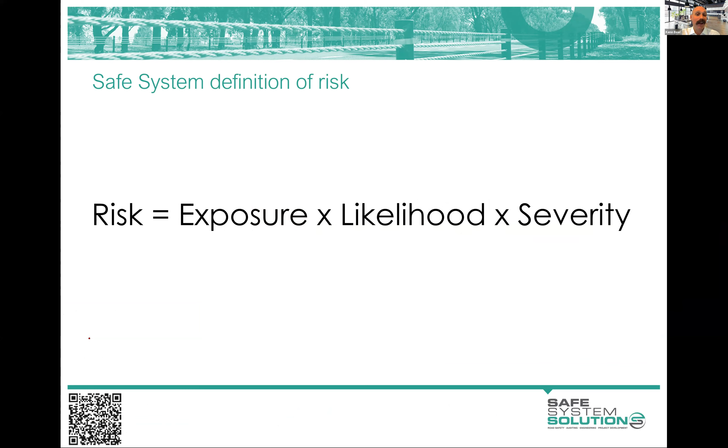Yes, so we're on to module 3, but I am going to start with a little bit of recapping now on just a couple of points. So I love the fact we're now really heading in this exposure, likelihood, and severity way of identifying risk, and starting to get more and more clarity around what factors are fitting into each of those. That is very critical to a safe system assessment. And as we did there with Ranjit, it was all about what can we change to influence, or what is influencing the number of vehicles going through that intersection, the number of pedestrians, number of cyclists.

That's our exposure factors. Now, there is a bit of confusion out there on exposure, because in a very traditional sense in road safety, we've used exposure very broadly. We've talked about things like length of time on a crossing, or number of conflict points as exposure factors, and a whole lot of different things. Also, in that new Austroads Guide to Road Design Part 6, which is roadside hazard management, they use a slightly different exposure calculating methodology. But for safe system assessments, it's tried to remain very simple for exposure, very clear, and very much not double counting anything.

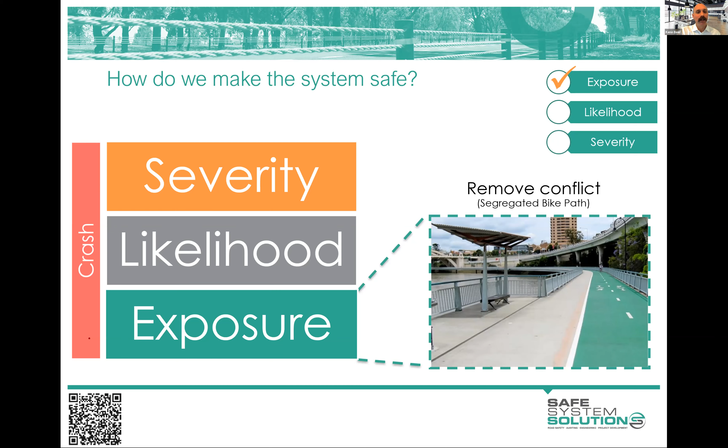So just boil it back to what's influencing the numbers going through there. If we've removed a vulnerable road user away from traffic, fully separated or with physical separation, we can attribute that to a change in exposure. And in the Austroads Safe System Assessment Framework, we see here there are definitions for these things, which I didn't get you too involved in before, but you see there, AADT, side road traffic volumes, number of motorcyclists, number of pedestrians, and the like. That's the key part of it.

Because of some of this confusion around exposure, likelihood, severity, how you score different things, where you attribute things: the Austroads Safe System Assessment Framework was developed without having done many, because it was a new process. That was in 2016, there was a bit of use of it at the start, and now it's becoming really widespread. We've been doing a lot of them over a long period of time, and we've identified areas where there is not good clarity in the Austroads document about specific elements.

We've talked to industry, mainly the Victorian Department of Transport, about this, and we've provided these clarity fact sheets on specific scoring issues that aren't well defined. We've provided all of those on your memory stick and in Moodle. This one's a relevant one for today's topic: when we have a cycling facility, how do we decide if it's changing the exposure, the likelihood, or severity? So if I've got a bike lane, we know that's likelihood because you're not physically separating. A distracted driver could easily enter that lane and hit a cyclist. It reduces the likelihood a bit. The cyclist is not directly in the traffic lane, but it doesn't separate it.

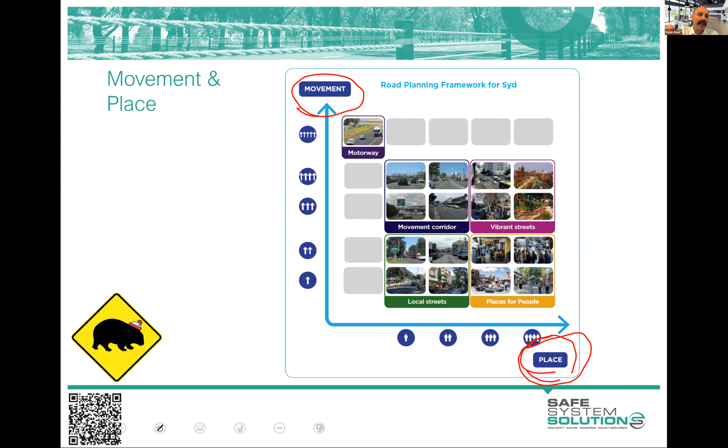So what you then have is the ability to categorize roads as to their movement function and their place function. And you can start up here at the very easy one of motorways, which have a very high movement function and no place value, okay? You're not going to have trade, interaction, socialization on a motorway. You don't want that, right? And so it is a movement corridor.

And I should say that movement is not just about moving cars and trucks. It is movement of people and goods. So in the same sense, we could have a fully separated bicycle superhighway, and that would be put in the full movement category. You don't want people socializing and trading and interacting on your major cycle route. It is a movement corridor.

Okay. Let's go to the other extreme, something that is almost exclusively place value, maybe a tiny bit of movement. We're talking about your malls or your shared zone areas, people interacting, permeating across the whole area, trading, socializing. We see lots of cafes and pubs and bars and shops and fruit stands and entertainers, it's an exciting, wonderful, interactive place. And we're not trying to move people and goods through there at any speed or at any volumes. That's not the function of that street or road.

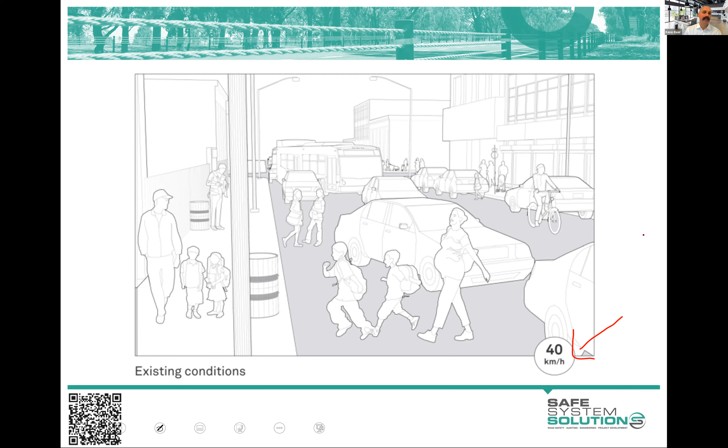And when you come up with ideas, put in brackets after it either an E for exposure, an L for likelihood, or an S for severity, as in this will alter the exposure, the likelihood, or severity. So maybe you decide you want road safety barriers down the side of the road here, which will reduce the severity of run-off-road crashes for vehicles that leave the road and are going to hit these poles. Now, I hope you won't be saying that, because I hope you can see how much that would erode the place value here.

It would give you better alignment with safe system principles and probably block some of the pedestrians walking on the road too. That's bad for place, right? So, in the exercise you would write, you know, install flexible barrier system on roadside, S for severity, influencing severity.

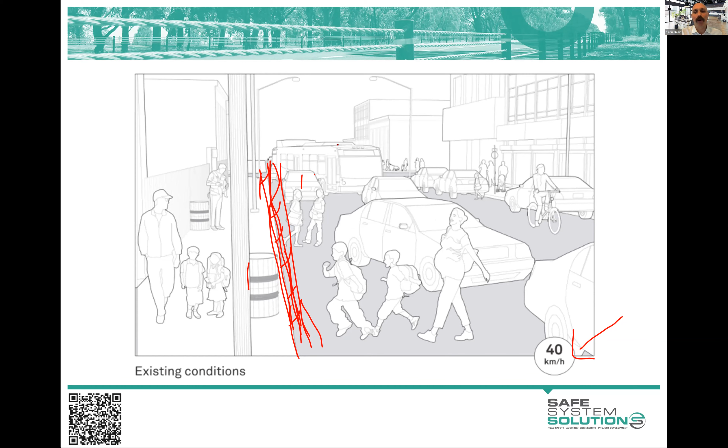So I want you to just spend 4 minutes or so. Have a stretch, fill up your coffee or water if you want. Have a think about some alterations to this area that could be done to make it better aligned with safe system principles, and also acknowledging it's a place for people function. Jot them into the chat and we'll come back in 4 minutes.

Okay, good question there, Cayman. Is it a public transport corridor? Yes, it's a bus corridor, as you've seen there. Don't get too worried though about the particulars of it. It's more the general idea that we're running with.

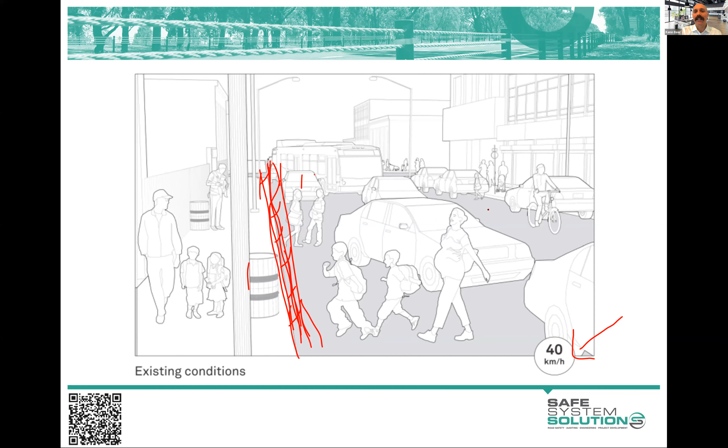So I think I won't get through everybody's comments there. I've had a quick scan. I think I've taken some of the main points, and I think you've done really, really well there. So let's look at artistic impressions of alterations to this. I better get rid of the barrier there. That's not going to help, is it?

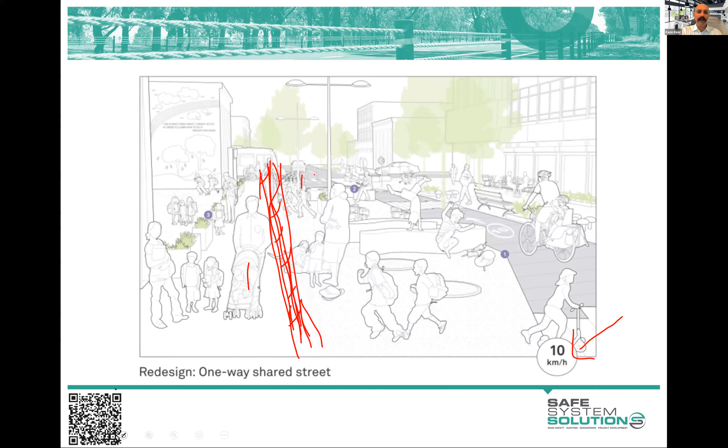I'm not saying this is right, but this is artistically a similar area where you've got these big widened footpaths, which reduces the likelihood of crashes. You've got very low speeds, reducing the likelihood. This is providing some movement function. As I said, I don't think they need these crossing points as such. If you can texture the whole area and have it as a shared zone, it's a far better outcome. I think this is actually from a country that I don't think uses the concept of shared zones.

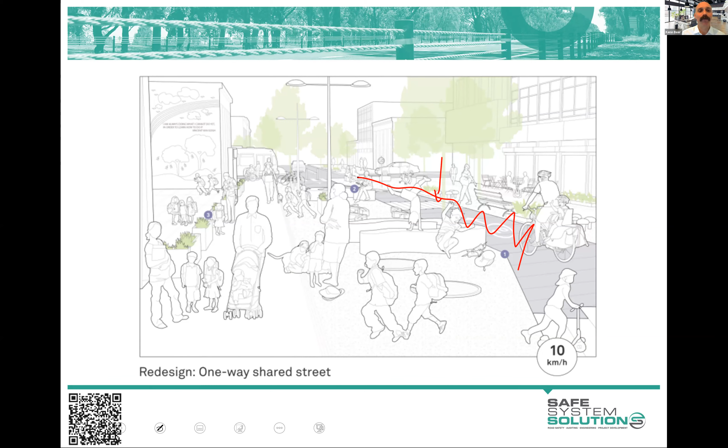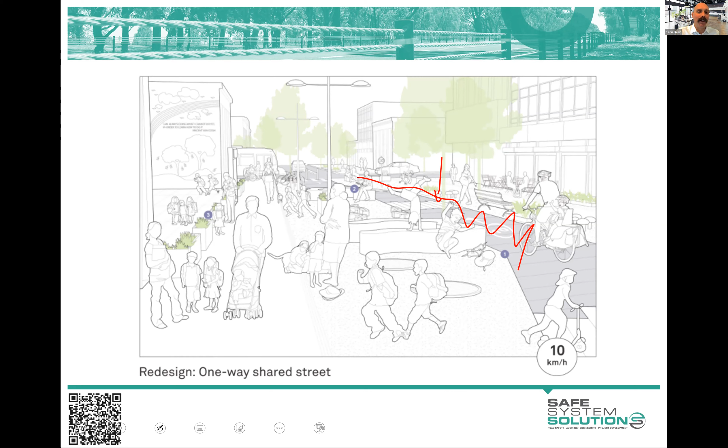It's actually from the USA, interestingly, which doesn't look like it. Looks more European, but they're trying to get more of that into some of the cities, which is wonderful to see. But you can see immediately that this area has more place value. And you can see also that it's going to be far, far safer: it's going to have reduced exposure because fewer vehicles are going through there. It's going to have less likelihood of crashes because of slower speeds. It's got wider footpaths and the like. And the severity is going to be significantly down. Wins all around.

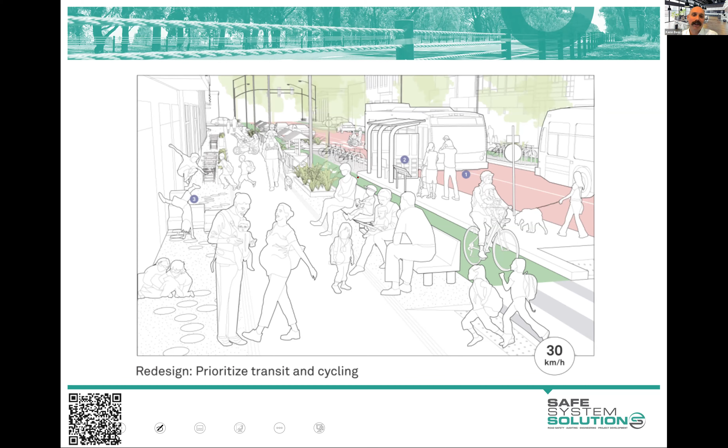As you raise that movement requirement, you can start to see some ways that this starts to get produced. This is as you're almost getting out of these major place-for-people-only thinking. But remember, I'm not saying here that it's about moving cars and trucks only. It's about moving people and goods. So we're seeing there dedicated cycle facilities as a major movement path, public transport. And this is where, exactly as I said, as we're starting to increase that, we're getting crossing points, but still big areas for pedestrians to provide that livability, the trade, the interaction, socialization, and all of those things that we align.

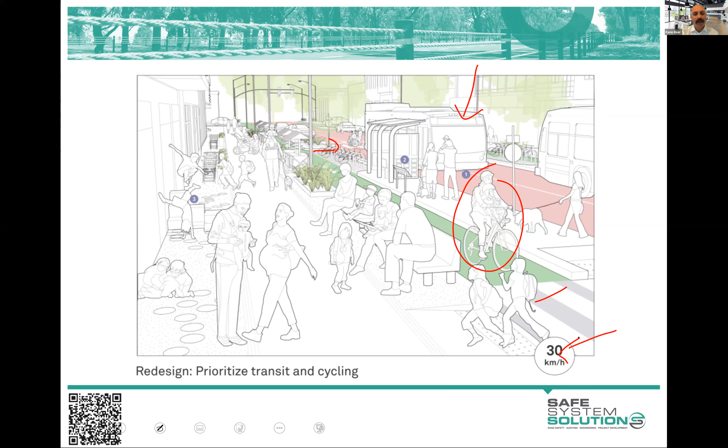In these places for people, this is the maximum speed we'd want anything traveling, okay? Because movement function is really not our major priority. It's increased, but that's not the big one. So, well done there. Let's move to local streets, and we won't do the same exercise for this, because it's very similar. There's a couple of key points I want to make though.

When you're in the area that has low place value and low movement function, you end up prioritizing the safety of the most vulnerable. And in fact, that's like transport planning 101, which many of you probably did at university and the like. You design and manage for the road user expending the most amount of their own energy, and they actually happen to be the most vulnerable.

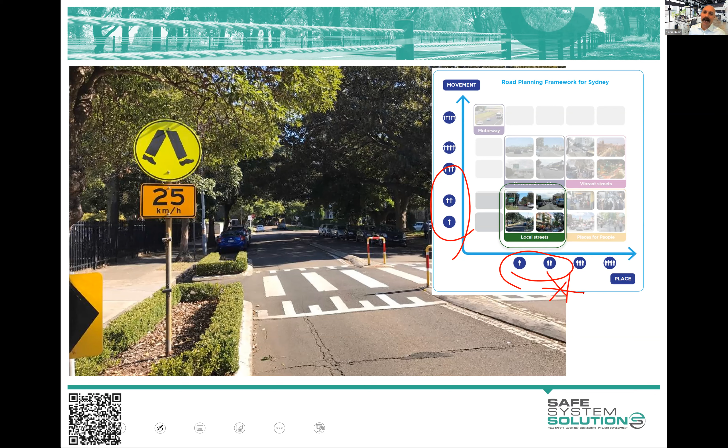So when we're down here, we end up making decisions which are more place related, but we still have more recognition of the movement function. So when you get an area maybe like this, and if it was said that actually this is low movement, low place value, you can still see the alterations that can be made to something more like this, where we're still retaining some movement function through there.

It's low speed though, because getting vehicles through the residential areas fast is not the priority. You maybe will have some collectors where you've increased the movement function and turned down the place function a bit, but we really don't need to be pumping vehicles through there, or you don't want to encourage vehicles to use it as rat runs and the like.

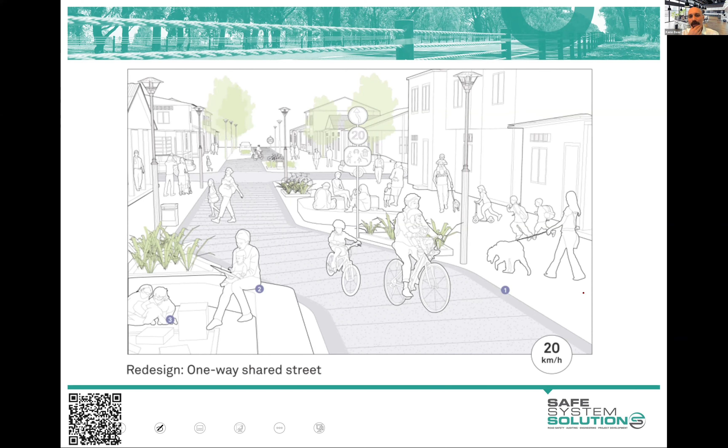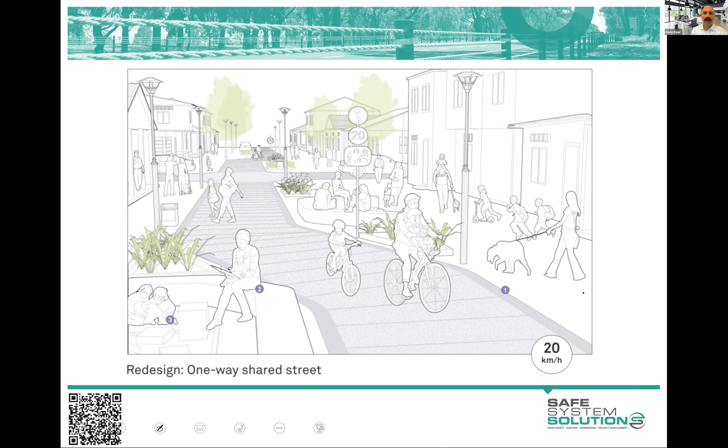And these are common sense transport planning related thinking, but it does play out more in some more tricky scenarios. And these are particularly tricky scenarios: vibrant streets, the high streets, and the like. So let's do this one as another little exercise, and it was a little bit more challenging, as you'll see.

Now, what we're saying here is that this is high place value. It's also high movement value. So when you do the same little exercise, I'm going to give you a little less time this time, because no need for your stretch break and refill of a coffee.

Just have a think about what can we alter in this road environment to improve alignment with safe system principles, but also get it better aligned with both that movement and place function that we wanted to do. So have a think about that. Pop some ideas into the chat. Do put in there exposure, likelihood, severity. But remember, it does have that place value function as well as a movement function. So let's see how we go with that. I'll give you a few minutes.

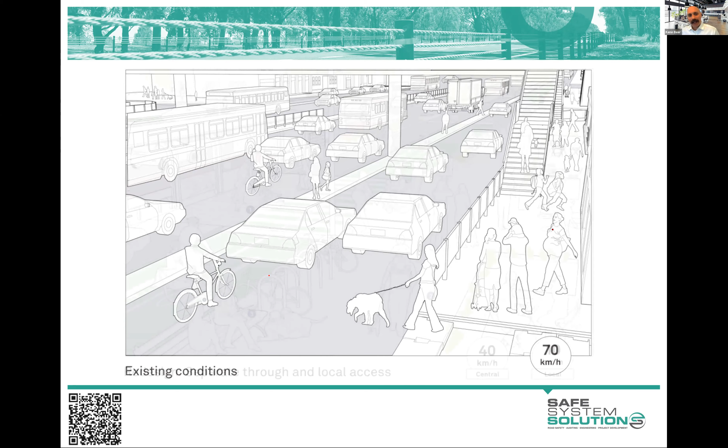Like here's again an artistic impression, and you've got to take everything artists do with a grain of salt on road network design. But you know, the general stand back, look at it principle is pretty good, isn't it? I mean, we've got obviously more place value here, and it's actually quite a nice place for people with the wider areas, the interaction, the trading, the dining. We still are providing the movement corridor, and remembering there that the movement is cyclists, the movement is the public transport, the movement is also the vehicles and the trucks. So we're moving them through there.

Now, getting these areas down to 40 km/h from 70, it might seem like, in our traditional way of thinking about the network, oh my God, the movement function, but when it's redesigned like this and it's got that different feel and look to it, it can be more palatable and it certainly aligns better with safe system principles. And we still do get movement through there. It just might not be that movement where we are just saying, well, how many cars did we fit through there per hour? That style of thinking, more holistic thinking of movement.

And that's very much the way we're moving in our management of the road network in that thinking. There are going to be areas where cars and trucks still have that major function, but they will be designed accordingly. There's little bits of challenges associated with this, but you do see some interesting things, reduced speed at some of the conflict points there, utilization of service roads and the like to separate out and even provide that sense of a faster route in the middle, and then slower as you're getting closer to the areas of more trade and interaction. So not going to dwell too much more on that.

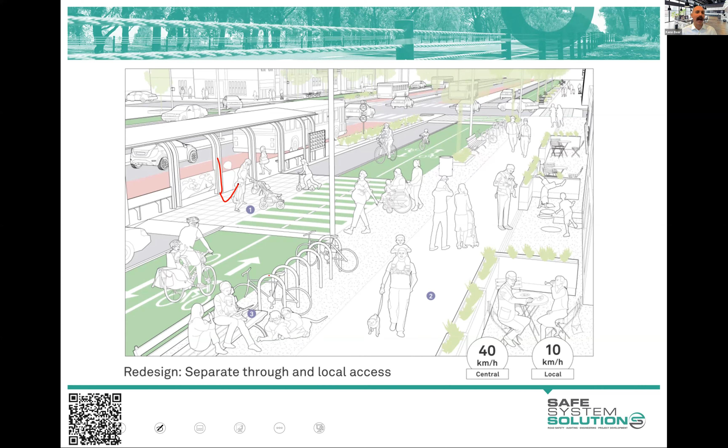But when we see that play out, we're trying to provide those facilities within the road environment, protected intersections and the like, which are becoming more and more common as you're trying to get road users into safer environments through these areas that still retain place value. And we talked about your decision making: is the addition of this bicycle facility a change in the exposure to crashes, the likelihood of crashes, or the severity of crashes with bicycles? I would say it's a change to the likelihood of crashes.

They are still exposed to crashes, in my opinion, both from vehicles distracted or whatever leaving their lane, and the bit of curbing there is not enough to stop a vehicle entering the lane. They also have all of the turn in and coming out facilities to deal with. So for me, these are likelihood reducing factors in a safe system assessment framework. At what point they actually change, there's a little bit of grey in there. There's a fact sheet to help you along the way there.

When we get to these big movement corridors, and as I say, there could be movement of cyclists, public transport, cars, or a combination, we're really actively able to reduce the place value of it, okay? So in the one we had before with the pedestrian overpass, I would say that if you have an area that wants high place value, you don't have a pedestrian overpass. Because that's an immediate reduction in place value, right? That is much more aligned with your movement corridor, that separation of road users.

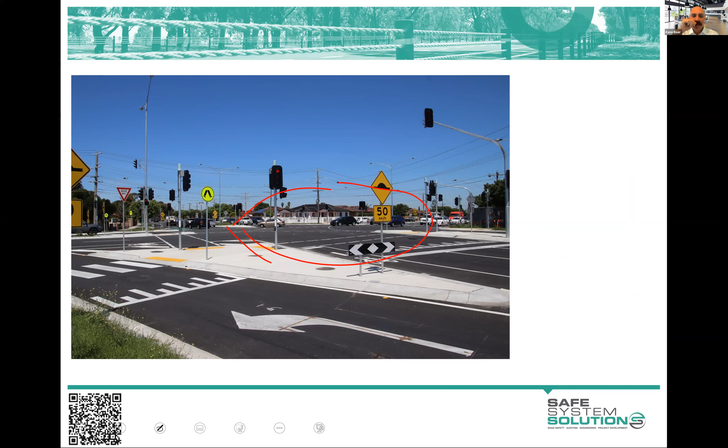So pedestrians and cyclists, we know they are most vulnerable to injury. We know around a 10% risk of severe injury at about 20 kilometers per hour, up to about 30 for death, and somewhere around 50 kilometers per hour, we're pretty certain death's going to happen for that direct strike. Young and old, even more vulnerable, obviously. And so we're trying to ideally manage speeds around 20 kilometers per hour where that crossing and interaction is happening. Otherwise, trying to seek that separation.

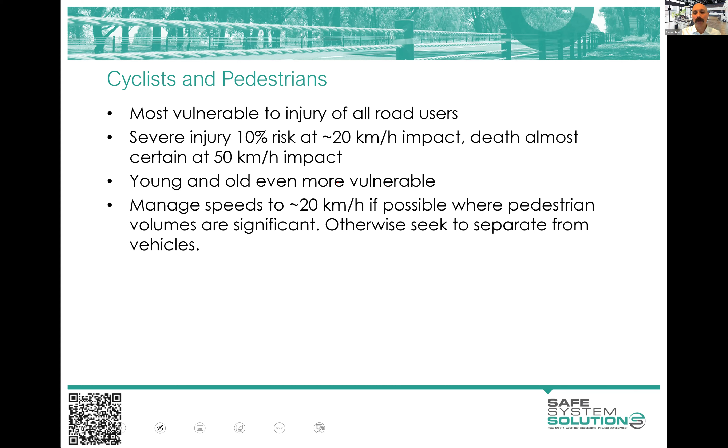Now, there's a little bit of play within that, a little bit of judgment required, and you'll do that quite well. We know those separating facilities are working quite nicely, putting cyclists curbside, utilising parked vehicles. Are we at the point of calling this a change in exposure? Almost, I reckon. As well, it's all about how vehicles get in and out of properties and side roads and the like. But generally, we're in some pretty good spots.

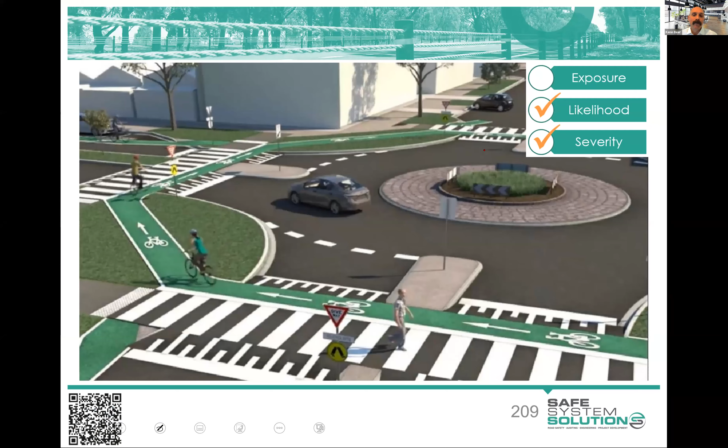And then we've got to analyse these wonderful facilities that we know have great wins for severity and likelihood, sometimes really severity for passenger vehicles, like a roundabout. We've talked about that. Not giving us as good benefits for cyclists and pedestrians. So how do you create wins all around? And we see things like the protected roundabouts, for example, here, which is another artistic impression, but I think I've got next a real photo of this one.

But we're seeing there, not only are we having reduced likelihood of crashes due to clear priority, elevation, better sight of pedestrians crossing and cyclists crossing, but we're seeing the reduction in severity due to the fact that we've got the roundabout, we've got the raised platform, we've got all sorts of good features. I don't have the live one of that, but I can provide that to anybody who's interested.

And then you can use similar thinking on larger roundabouts. How do we create separation? How do we create lower speeds and conflict points? Here's some different ideas for larger separated roundabouts where you have riders come off the road and they deviate slightly over their own facility, maybe with priority, but if they have to do the right turn, maybe they have to wait there. So we're getting wonderful reductions in likelihood and severity at these locations. Still exposed to crashes because of a conflict point with vehicles coming in and crossing, but lower likelihood, lower severity.

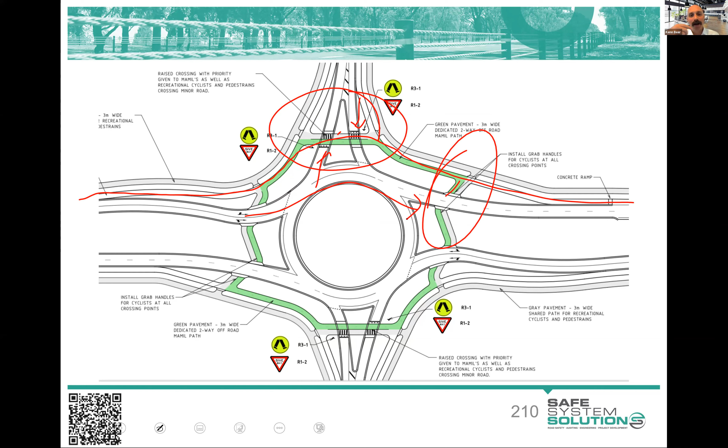Down here, we're probably mainly focusing on the likelihood, and the severity is not going to be coming through if you're doing a retrofit to a multi-lane roundabout. If there was no intersection there and this was a brand new roundabout, you might get some reduction in severity because of the speed reduction of the roundabout, but we just analyze through all of this. Adapted Dutch diagram here just for your use, but those low speeds we can mix because the severity will be very low.

Prize for the person who tells me what that is first. I stumped everybody. I'm sure somebody knows what that marking is. There we go, Alex. Alex is on there. It's a Sharrow, correct.

Yeah, so the broad principles here: the ability to share when our severity is low and the likelihood is low. As you increase your speeds, you want physical separation, be that a barrier or a big curbing or the like, or utilizing parking. And then at your high speeds, you hit up the exposure and completely separate the facility and move it into no exposure.

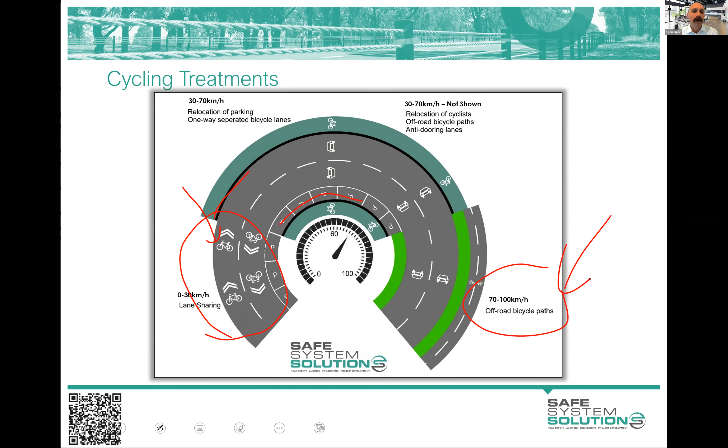So pedestrians, I'm going to briefly touch on that. So in that roundabout design, the ability for a vehicle to store is important, as Neil's rightly pointed out there.

So the idea of pedestrians crossing, and to me, the wombat crossing or the raised pedestrian crossing, depending on where you come from, is just such a wonderful safe system aligned feature. It just ticks all the boxes for me because you've addressed likelihood due to elevation, due to clear priority, and you've addressed severity due to the lower speeds.

We know that just an at-grade zebra crossing or at-grade pedestrian crossing is not a great safety feature. In fact, in quite a few situations, it increases the risk of pedestrian crashes. The likelihood's down, the severity's up. Sometimes likelihood even goes up a little bit because of pedestrians walking straight out without looking because they have priority, but also vehicles with speed and inability to stop and those sorts of things. But the raising of it is just an amazing feature to significantly improve both likelihood and severity. And so it's really a wonderful feature.

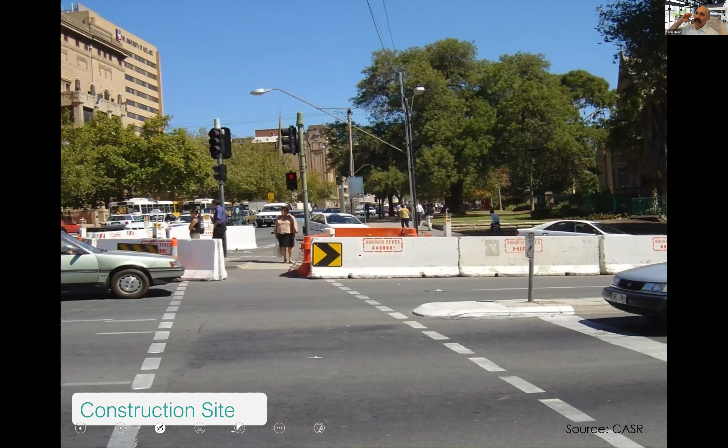This one, though, I'll just briefly show you. We have known how to create safe system environments for pedestrians for a very long time. And this is an example in Adelaide, a photo I was given, but I saw the overarching elements of it. There were a couple of workers doing stuff on the electrical conduits and everything in the island there, and they were working there for a couple of weeks or something. So this is in South Australia. So in order for them to do their work safely, they reduced the speed limit on this road from 60, at the time it was, it's not 60 anymore, to 25 kilometres per hour, because that's South Australia's work zone speed limit.

Physical barriers to separate. Off they went, did their work, finished, packed up, took the barriers away, speed back to 60, and then about 3,000 pedestrians a day standing in that spot, crossing here, crossing there.

So why is it that the workers are afforded that level of safety, but the general public, we say, it's up to you, really, be alert? The reality is that, yes, the workers are looking at their work and not concentrating on traffic and the like, but a lot of those pedestrians are looking at their phone, or intoxicated, or concentrating on different things.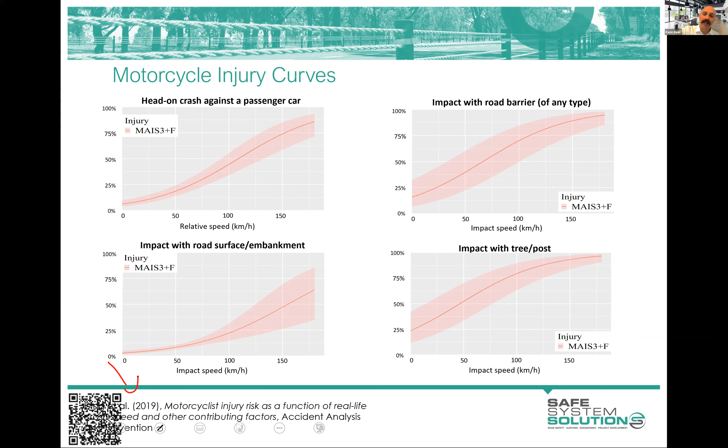It's above our pedestrians and cyclists. This hasn't filtered into too many of the Austroads guides or anything like that yet, but it's interesting just to understand. So let's briefly look at these. The likelihood of motorcycle crashes is driven by the fact that they're smaller, they're inherently unstable, being on two wheels. But they can be hidden behind smaller things like trees and the like. So smaller sightline constraints are more pronounced in increasing the likelihood of motorcycle crashes.

Harder to see, hidden behind things, all of those challenges, the inherent instability are sort of inherent likelihood factors. The surface is also a likelihood factor, and the fact that a motorcyclist takes that sort of lean to go around a curve or a corner.

I'm a licensed motorcycle rider, I should say. I'm way too scared to actually ride, but I did enough riding in order to understand more about the needs of motorcyclists and be able to do better stakeholder interaction with motorcycle communities and the like. So I've done some riding.

I would not call myself a good rider, but anyway, motorcycles lean to take a curve, as you know, with very small contact patches on the road. And what it means is the physics of that basically says that the surface is highly important. We call motorcyclists the canary in the coal mine for surface defects. They're the first ones to be killed or seriously injured. So surface becomes quite a factor in the likelihood of motorcycle crashes in your safe system assessment.